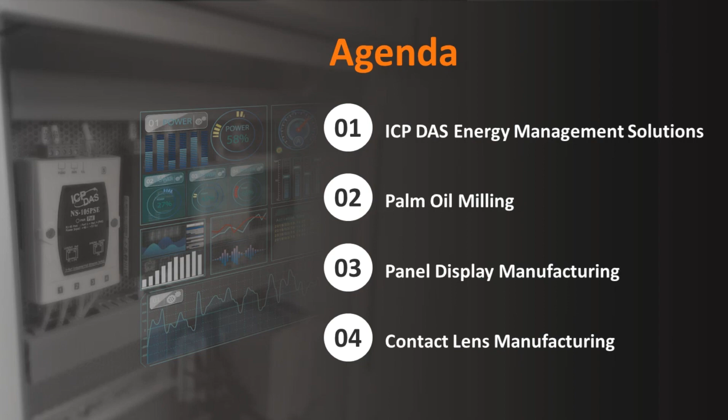Today, I would like to focus on energy management solutions first. I will briefly show you how complete and powerful our energy management products are, followed by 3 application examples where ICP has worked closely with our clients to identify their pain points, and then we implemented step-by-step projects to achieve outstanding results.

ICP energy management solutions are widely adopted in various industries, spanning palm oil, panel display, contact lens, and semiconductor manufacturing industries, as well as renewable energy industries and campus projects. So let me explain the case study of the first 3 industries in the following. But before that, let's have a look at ICP energy management products, which are holistic and reliable.

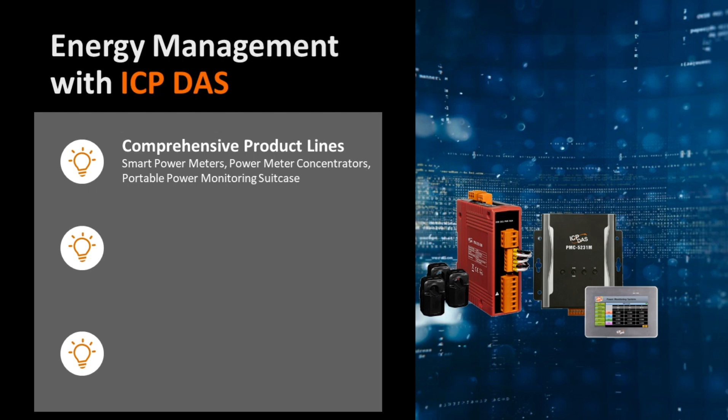We have 3 comprehensive product lines here: smart power meters, power meter concentrators PMC series, and PMD series equipped with an LCD touch panel, and lastly, the portable power monitoring suitcase.

The capabilities are extensive. ICP power meters feature high measurement accuracy, which is paramount to obtain reliable energy data. Besides, they support many protocols for seamless integration with your existing system. The unique power meter concentrators PMC and PMD series perform if-then-else logic control and data recovery functions. This can be configured via a web-based interface, and more features will be introduced later together with case studies.

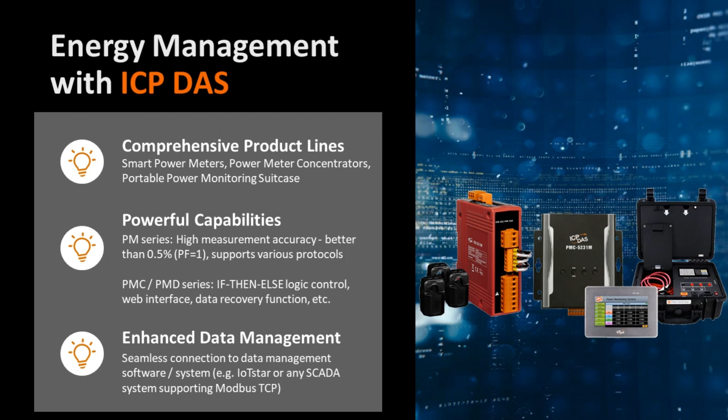If you want to manage power data effectively, our products can also be seamlessly integrated with data management software or systems for easy data management and visualization.

Plants of any size generate data at all times. If we could capture it, collect it, and visualize it for insights and analytics, we can find potential approaches to reduce power consumption, which also means saving time, cost, and facilitating a smaller footprint for equipment and devices.

Given the shortage of raw materials such as natural gas and coal, the resultant ever-increasing electricity bills force businesses to look for energy management solutions. In addition, the global climate protection initiatives drive stringent environmental regulations, and hence energy saving and decarbonization have become the main focus of businesses. This is particularly an issue for energy-intensive factories, which are equipped with lots of motors, pumps, air compressors, and manufacturing equipment. Energy-efficient production sounds valuable here, right?

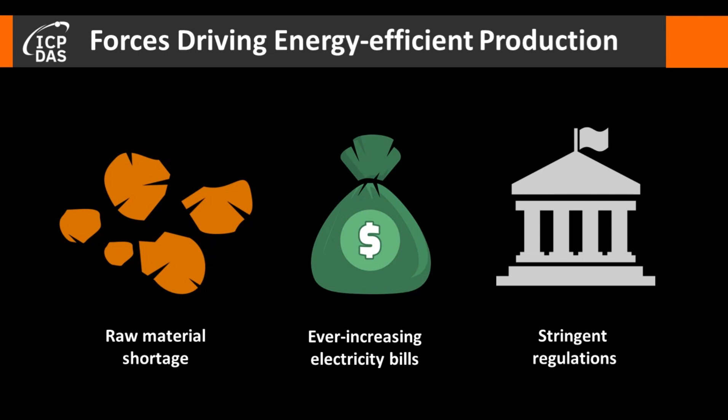And yes, it is. To be one step closer to this goal, the first step is to build a foundation to monitor and optimize energy use. Without further ado, let's dive into our first case study, a palm oil manufacturer in Thailand.

This is one example that ICP not only helps the client to build an energy monitoring system, but also the start of digital transformation. The client in Thailand faced difficulties arising from manual inspections, operations, and transcriptions, which were time-consuming and inefficient.

Palm oil tree is only grown in the tropics, and its oil is extracted from the fruits for many usages. You can find it as an ingredient in our daily necessities such as edible oil, biodiesel, and cosmetics. The edible parts of the fruits are called palm kernels.

The staff is responsible for pouring palm kernels into the storage hopper and manually monitoring the kernels dropping into the machine. Do you know that palm kernels are very sticky by nature? So its stickiness often causes a slower processing speed of the screw. This is especially a major headache when the machine is overfed with feedstock.

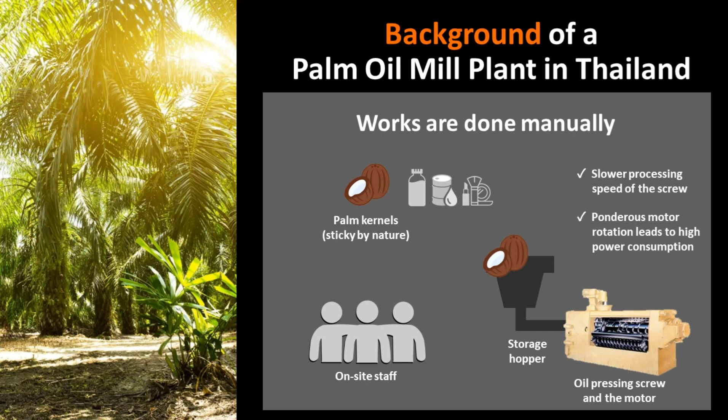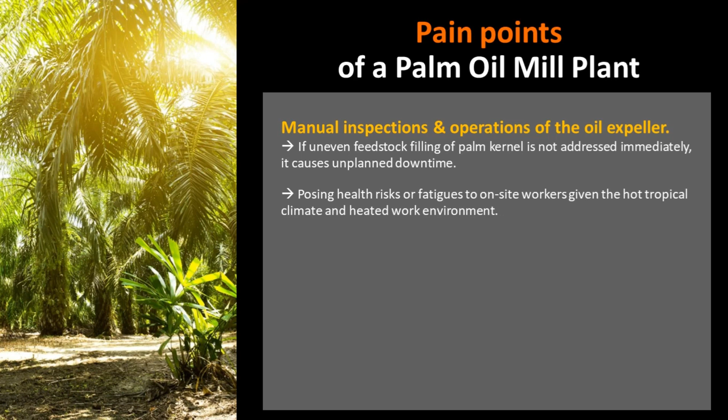Since inspections and operations of the oil expeller were carried out manually, it caused unplanned downtime if on-site staff didn't address the problem of uneven feedstock filling timely. Given the tropical climate in Thailand and the heated work environment in the palm oil mill, on-site workers are vulnerable to health risks like heat stroke or fatigue.

And the downsides of manual transcription of data are as follows. Data may appear perfect on the record sheet, but are often inaccurate. By verifying the on-site work record sheet and the machine status in the field, we found out that parts of them didn't even match each other.

For example, machine number 2 was recorded as operating for 10 hours, but it wasn't turned on at all. This was especially a problem on the night shift, as workers might feel sleepy, which results in poor work performance. This way, the data obtained becomes unreliable and less valuable.

Data on key performance indicators are not transparent and difficult to be compiled. For instance, production output, machine status, and availability were difficult to be collected and shared in real time. The information was always not up to date.

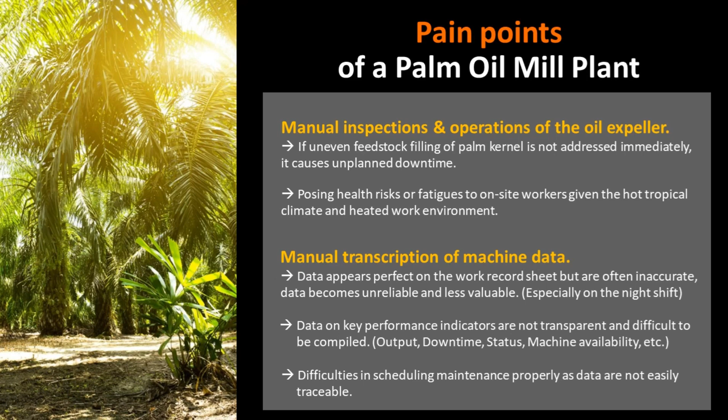This led to difficulties in scheduling maintenance properly, because data are not easily traceable, and thus there is a higher possibility of machine downtime and also additional cost incurred. So ICP thus worked alongside the client and supported them in the digitalization of the plant.

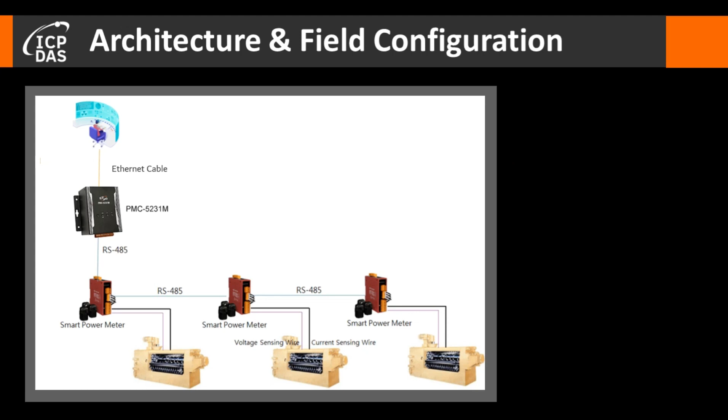We deployed smart power meters and power meter concentrators, then transmitted the real-time data to the SCADA system for energy monitoring. Here is the architecture and the field configuration.

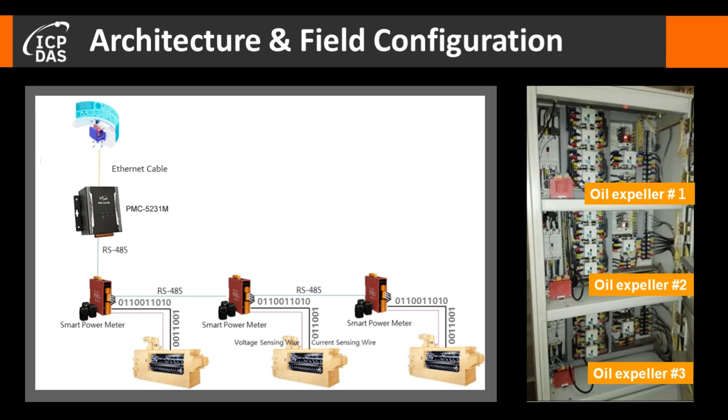Our expert team suggests employing 3-phase smart power meters to obtain reliable power consumption data from the oil expeller motors. The data are then transmitted to the IIoT power meter concentrator through the Modbus RTU, stored and logically calculated before being sent to the SCADA system through the Modbus TCP protocol.

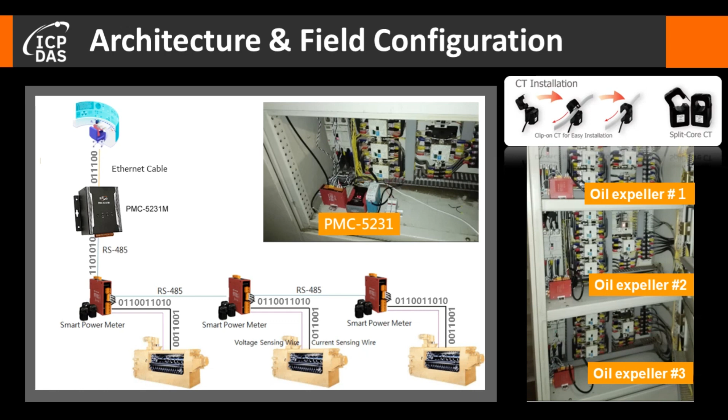If you want an easy installation of your smart power meters, we have the right product for you. One of our smart power meter advantages is the clip-on current transformer. Without having to make a significant change to your existing machines, you can get the power information simply by installing our clip-on CTs. After getting the power information, PMC collects the data and sends it back to the management software.

PMC 5231M, adopted in this case, supports Modbus TCP, RTU, SNMP, FTP, and MQTT protocols, and therefore, it ensures seamless integration with SCADA systems and IT networks such as manufacturing execution system, management information system, and cloud-based system.

If you don't have any data management software, don't worry. Our PMC series also runs on web browsers, and all you need is just a PC. Building a power monitoring system has never been so easy.

From here, you can see the electrical values such as voltage, current, and the real power. Based on the current, you can keep abreast of the machine status and different levels of the machine load. And therefore, you can schedule maintenance for machines that constantly operate with high load.

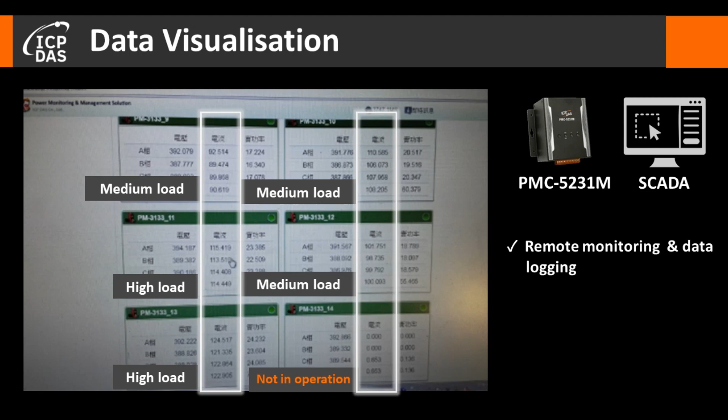This achieves remote monitoring and data logging, which were previously done manually. Besides, the timely and historical data are clearly displayed in the control center for easier machine management.

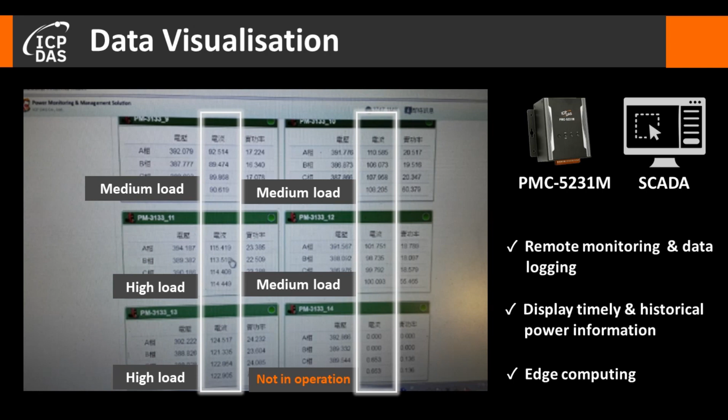What's more, the Power Meter Concentrator PMC series performs edge computing, which reduces the computational complexity for the SCADA system, and this makes the whole network operation smoother.

Other than the above-mentioned way to schedule maintenance by monitoring the current and the load of the machines, electrical values such as voltage input can also be used together with current output for data analysis. Based on different methods and models, staff can detect abnormal machine behavior and schedule maintenance before failure events. And this achieves predictive maintenance.

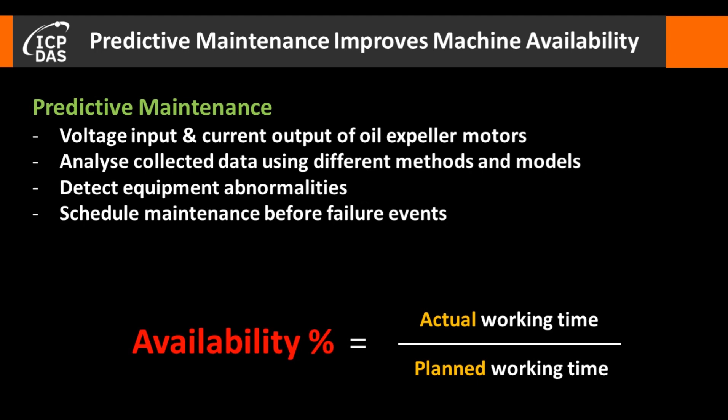Since machine availability means actual working time divided by planned working time, predictive maintenance minimizes factors contributing to low actual working time, and therefore maximizing availability percentage.

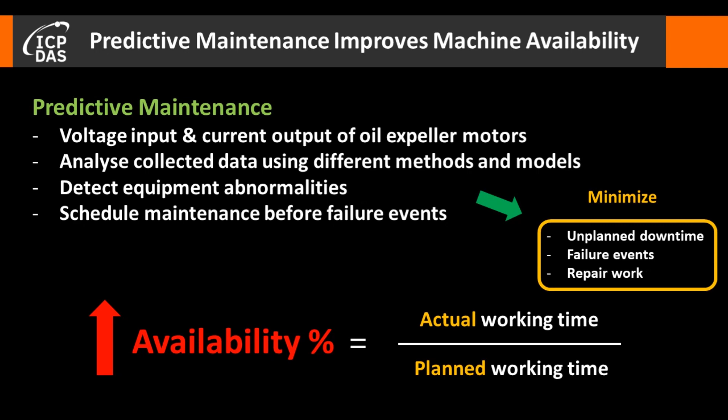Let's look at how powerful the ICP DAS PMC series is. The configuration of the PMC can be done via a web-based browser with no additional programming required for parameter settings. Building a power monitoring system is so simple and straightforward.

PMC series generates power consumption reports automatically, and one can review and check daily, weekly, and monthly reports for power management and cost references. You will be able to figure out which machine consumes lots of excessive energy and take some actions to mitigate the problem.

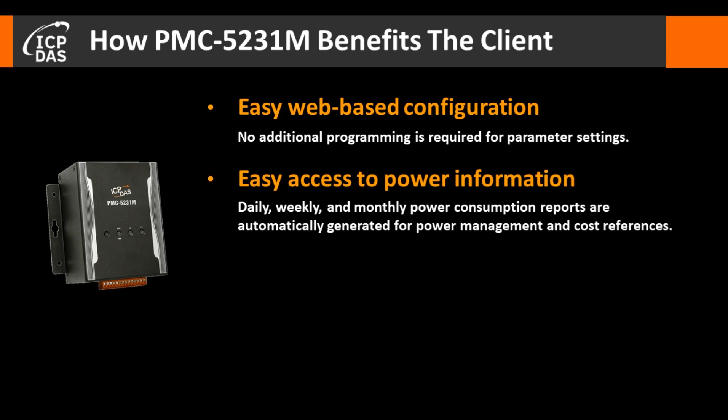The if-then-else function is also another potent feature. You can set the if condition and then trigger actions such as sending alert messages and turning on on-site lights when there is insufficient feedstock or unplanned machine status.

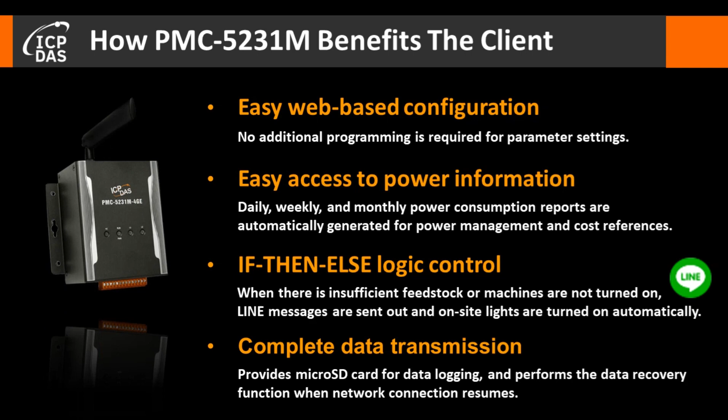Moreover, it also ensures complete data transmission with a data recovery function. If you are looking for a version that supports wireless communication, yes, ICP DAS has the right product for you. PMC 5231M 4GE for you as an option.

Now, we can give a check to see if pain points have been tackled. Remote monitoring and control replace manual inspections and operations. Less unplanned downtime and a safer work environment are achieved. Let's put a tick here.

In the middle, we see data logging replaces manual transcription of data. The client thus obtains accurate, reliable, and real-time data. Besides, the digitized data can be used for data visualization and auto-generation of reports.

Instead of performing run-to-failure maintenance, it offers great convenience for the personnel to not only access but also trace key electrical values for predictive maintenance. All this ensures few failure events and machine downtime. So this part is ticked as well.

Let's take a look at overall weaknesses and benefits before and after project implementation. The deployment of human resources is now much more efficient, and the whole manufacturing process becomes time-saving.

Besides, the problem of low productivity, especially on the night shift, is resolved. The huge financial losses incurred by machine failures and unplanned downtime are also avoided.

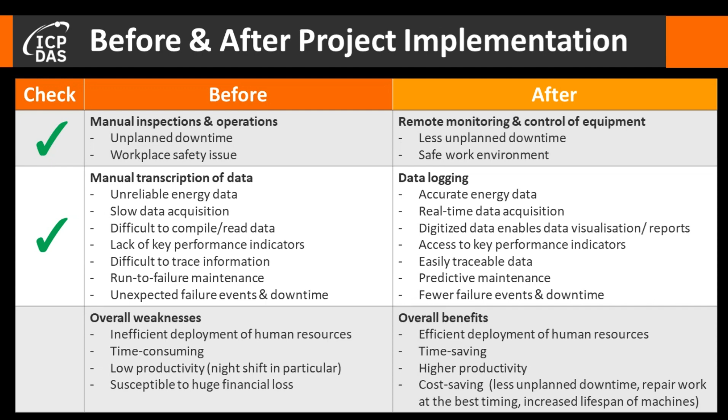Machines that consume excessive energy can be detected and repaired at the best possible time. Moreover, the lifespan of the equipment is extended through predictive maintenance. So, the problems have been tackled, and we ticked here too.

A quick summary of benefits. Productivity was raised by 28% through IIoT connected equipment. Data logging replaces manual data entry. It's time-saving and more accurate.

Remote monitoring replaces on-site inspection, which minimizes health and safety risks. Digitized information enables data visualization, and the staff can view energy consumption at a glance. It also provides a window of opportunity for maintenance planning, which reduces unplanned downtime and saves costs.

Another application is a panel display manufacturer with outstanding results. The manufacturer mainly produces TFT LCD, LCD, and touch panels. Since inverters were installed for manufacturing display panels, the client wishes to ensure smooth operation by measuring the alternating current. HEPA filters were also employed to reduce contaminants in the clean room. To know the best timing for replacing the filter, the client also installed differential pressure sensors on the HEPA filter.

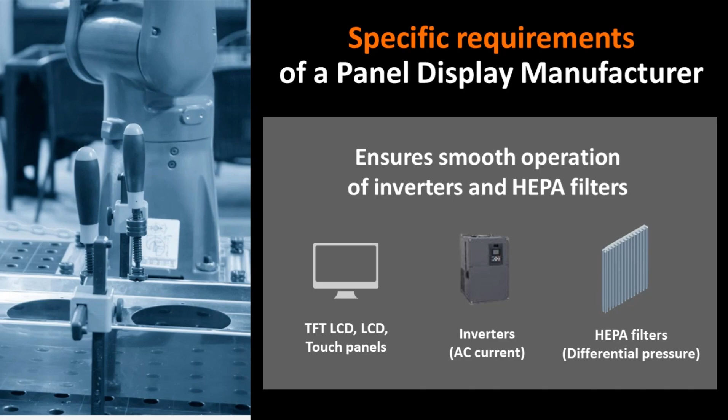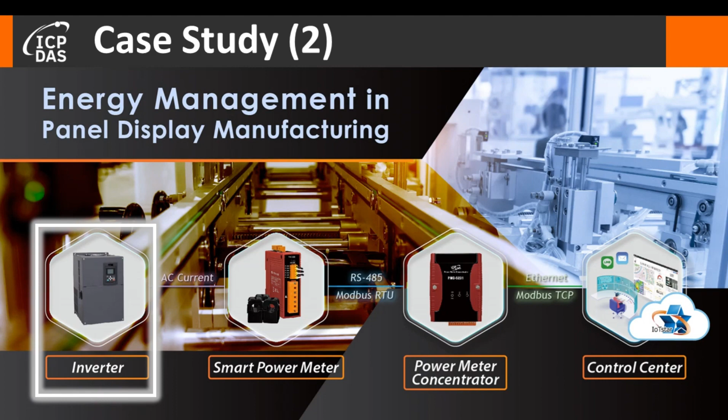What ICP did was build a wireless communication system to transmit differential pressure data from the field to the control center. Same as the first case study, we deployed ICP smart power meters and power meter concentrators. However, this time we are monitoring power information on the inverters, and we built the IoT cloud system with IoT Star for clearer data visualization.

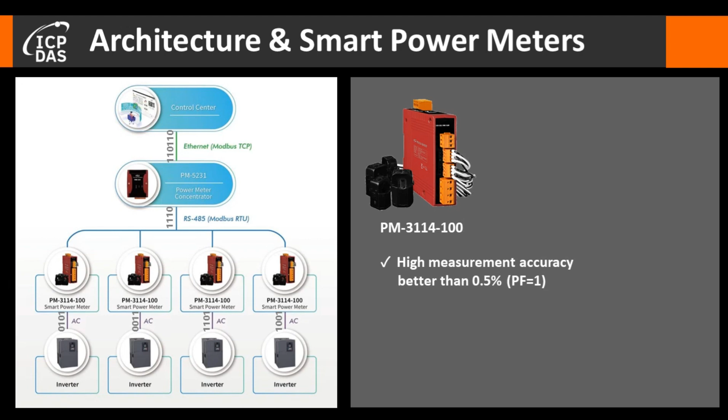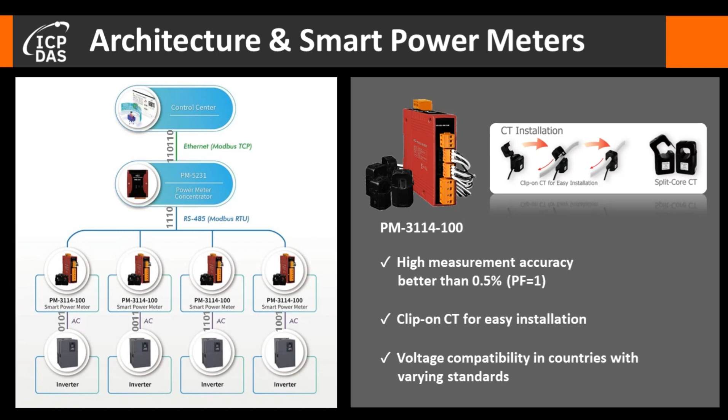Measuring devices PM3114-100 are installed on all inverters to obtain energy information. The data is then transmitted via power meter concentrators to the IoT Star. Besides high measurement accuracy and easy installation of clip-on CTs, ICP smart power meters can be applied in various countries with varying voltage standards. With the assistance of ICP smart power meters and power meter concentrators, the client has gotten real-time and reliable data on inverters' power information.

What's next? We complete the energy management system with an IoT cloud system. IoT Star is a software developed by ICP for a variety of industrial IoT applications. Deploying powerful IoT software is essential to elevate ESG performance. IoT Star enables the building of an IoT cloud system and connectivity of our WISE, PMC, and PMD series.

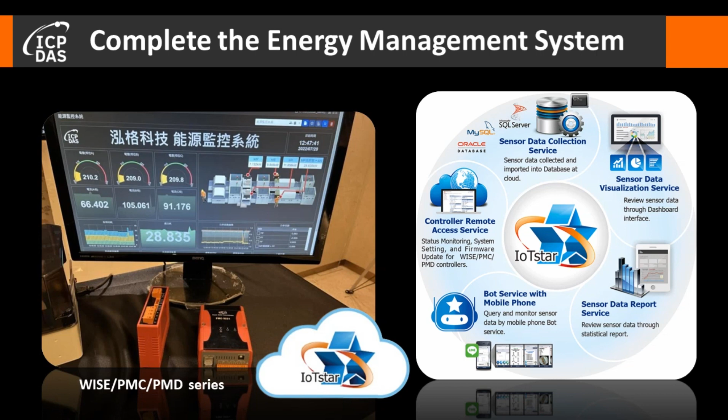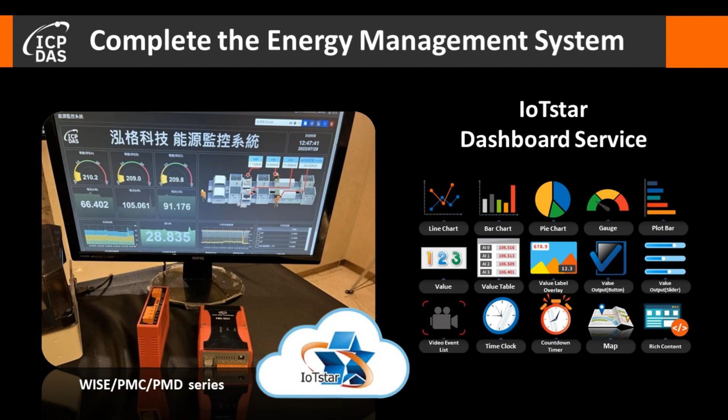The software offers 5 core services, which include remote access and maintenance, sensor data collection and storage, dashboard, report, and bot services. With the IoTstar Dashboard Service Package, users can customize their dashboard with a wide variety of widgets provided, quickly setting up the dashboard page for real-time sensor data, including energy data.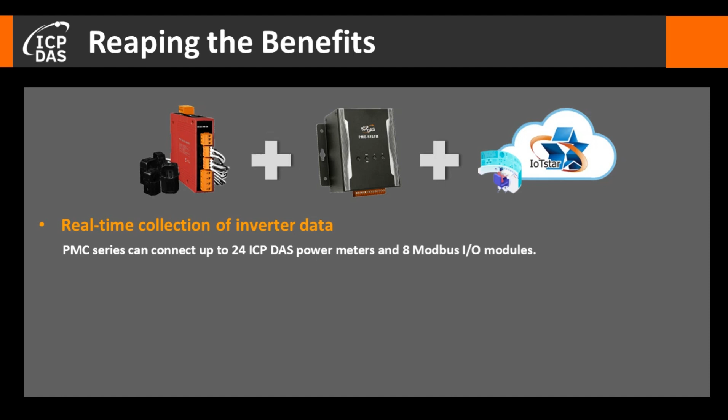The results? The panel display manufacturer is able to collect real-time data from the inverters. ICP DAS PMC series can connect up to 24 ICP DAS power meters and 8 Modbus I/O modules, so it's very cost efficient. Once data is at your fingertips, machinery protection of inverters becomes much easier.

Facility staff can review energy consumption data and identify deviations to schedule maintenance at the earliest possible point in time. This reduces machine failures, unplanned downtime, and most importantly, reduces huge financial losses. Last but not least, the IoTstar dashboard clearly shows various indicators, allowing for easy footprint calculations and management.

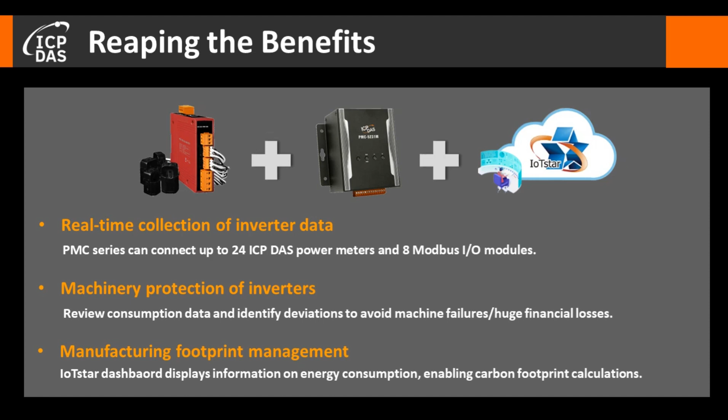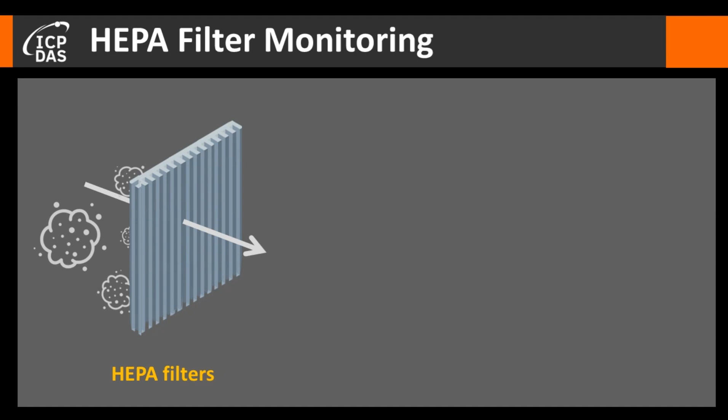After introducing the energy monitoring system for inverters, let's talk about the HEPA filter monitoring this client adopted. The high-efficiency particulate air filters are widely installed in cleanrooms for effective air filtration. To find out the best timing for replacing the HEPA filter, the client carried out differential pressure monitoring by installing sensors at the inlet and outlet of the filter.

Hence, data on the pressure drop across the filter can be obtained. When particulates accumulate, the frictional forces lead to a higher pressure drop between the 2 points. Once the pressure drop reaches a particular inefficiency threshold, this indicates the HEPA filter needs replacement.

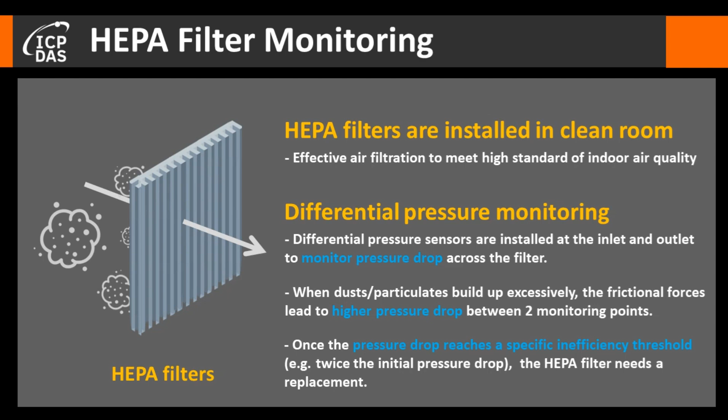What ICP DAS did was build a wireless communication system for data transmission. We employed our Zigbee I/O modules to collect data from differential pressure sensors through Modbus RTU, and then the I/O modules wirelessly transmit the data to the Zigbee converter. In the end, the data are sent to the SCADA system via Modbus TCP.

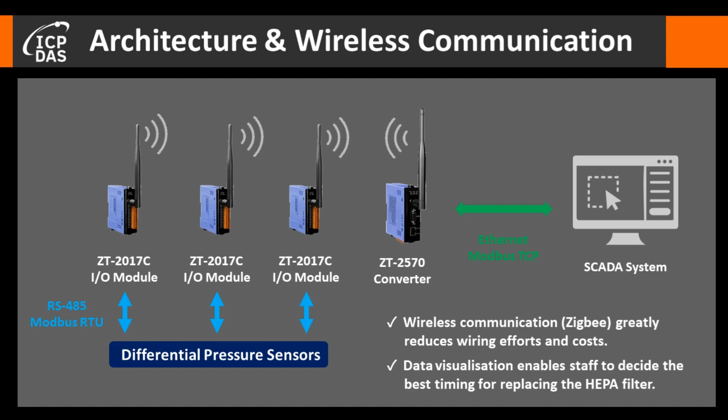This architecture greatly reduces wiring complexities and costs. At the same time, data visualization enables staff to decide the best timing to replace the HEPA filter. And most importantly, this ensures a conducive cleanroom environment.

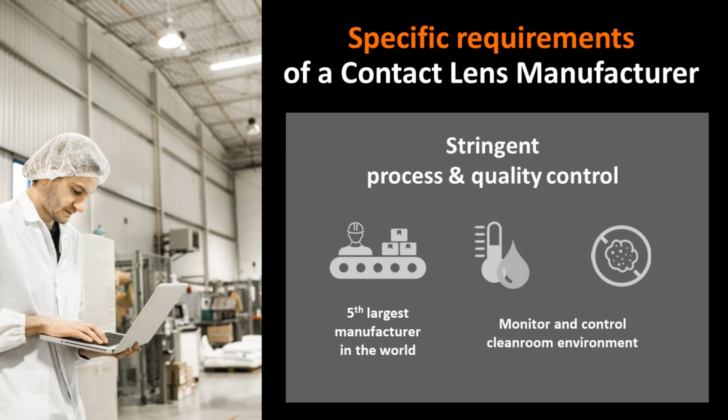Another iconic application is a contact lens manufacturer, one of the largest in the world. To ensure product quality and consistency of product line performance, the client carries out stringent process and quality control on the shop floor and in cleanrooms. Therefore, they requested energy consumption and environmental monitoring solutions.

We deployed ICP DAS power meters, power meter concentrators, and the environmental monitoring modules DL series to monitor and control the cleanroom environment and machine status. And ICP DAS LED message display was also placed in the field to keep staff informed.

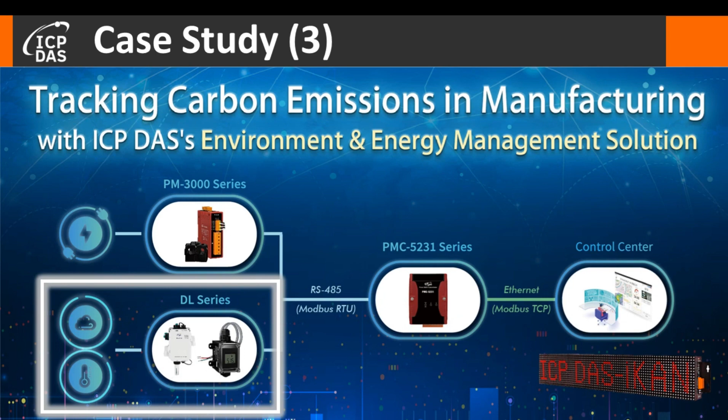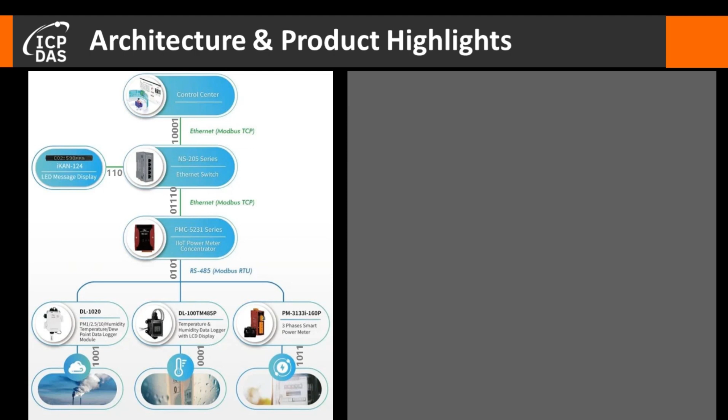The architecture is pretty similar to the previous 2 case studies. However, this time, we added environmental monitoring modules and an iKAN LED message display. The smart power meters adopted in this case study are also very special.

From its model number, you can see that it has built-in circuit protection to prevent CT placed on the secondary side from causing open circuit danger to humans. It also has built-in AC isolator protection, meaning total isolation between the AC measurement side and the control side. These features further ensure functional safety and worker safety at the same time.

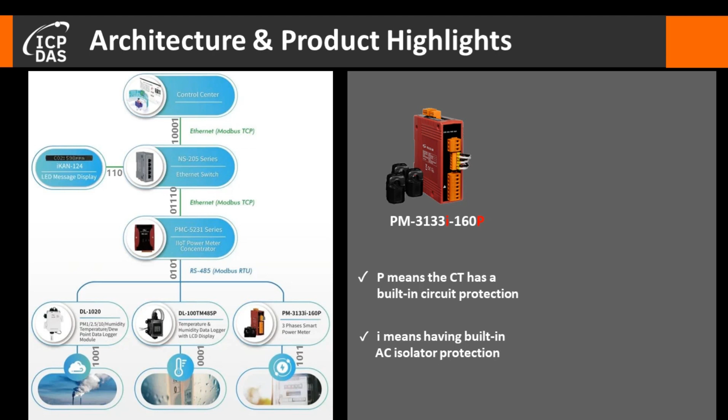Besides, the iKAN LED message display also features powerful capabilities, as it is anti-noise and easy to use, and it supports multiple languages with 7 colors available.

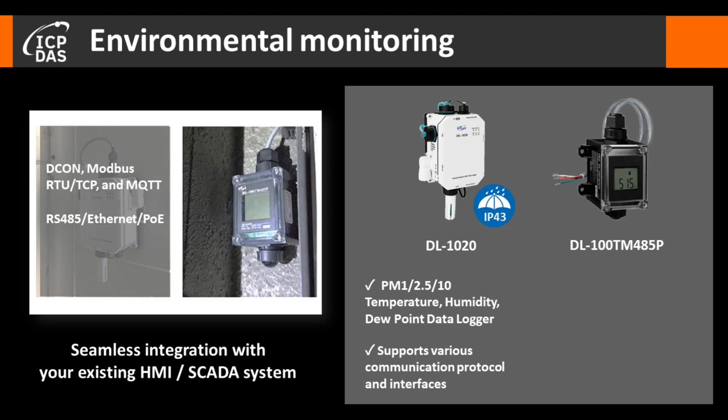For the environmental monitoring, the DL1020 data logger module is IP43 rated. It measures and records PM1, PM2.5, and PM10, temperature, humidity, and dew point. Besides, it supports various communication protocols and interfaces for seamless integration with your existing HMI or SCADA system.

The DL100 series module is a remote temperature and humidity data logger with LCD display. It has an IP66 rating and performs with high measurement accuracy.

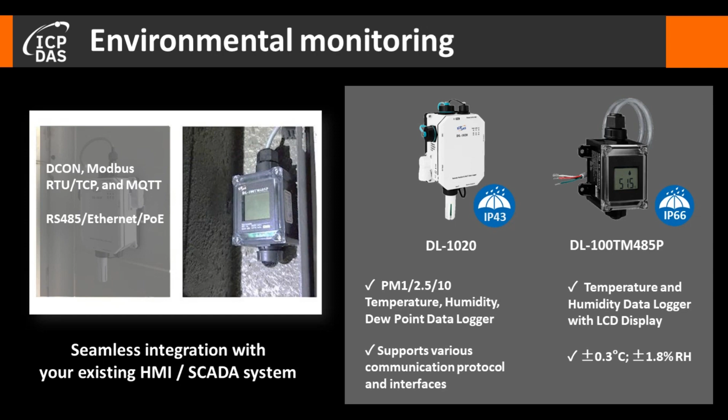The DL-100 series supports convenient data access and has a cost-effective design. One can obtain real-time data anywhere and at any time using the iAir utility, the iOS or Android app, which are free of charge, or via a regular web browser, as long as they are connected to the same local network as the data logger.

The replacement filter is also provided for easy and simple maintenance, which can be done by the facility staff. This greatly saves cost and time incurred by repair services. Besides, it also further enhances measurement accuracy by reducing inaccurate data obtained from clogged sensors.

What are the benefits here? This solution ensures effective management of data on power consumption and environmental variables. Once data are well organized and evaluated, the client is able to perform stringent process and quality control of contact lens manufacturing in both clean rooms and production lines.

Besides, actions can be triggered via if-then-else logic control to adjust the on-site environment conditions. For example, sending alarm notifications to the right personnel when PM2.5 readings exceed the set value.

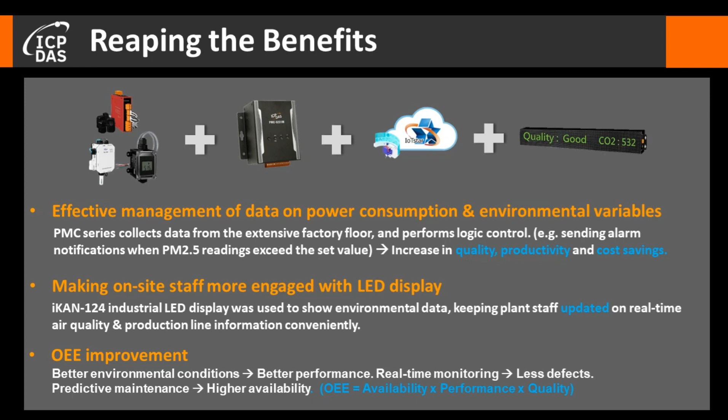With ICP DAS energy management and environmental monitoring solutions, the client doesn't have to guess what environmental factors may lead to quality defects. There's no more wondering about when is the time to repair which machines, because data are more transparent and can be acquired in real time for clear data visualization and actionable insights.

In summary, ICP DAS energy management solutions comprise 3 architectures so far: PM series, PMC/PMD series, together with PMC data server, SCADA system, and web pages for data visualization. PM series, PMC or D series, together with IoTstar dashboard display for cloud-based applications. And PM series, PMC or D series, together with environmental monitoring modules, IoT Star, and iKAN series for field display.

Our product series support various communication protocols and interfaces. Therefore, all machine data can be integrated into your existing system very easily based on your company's preferences.

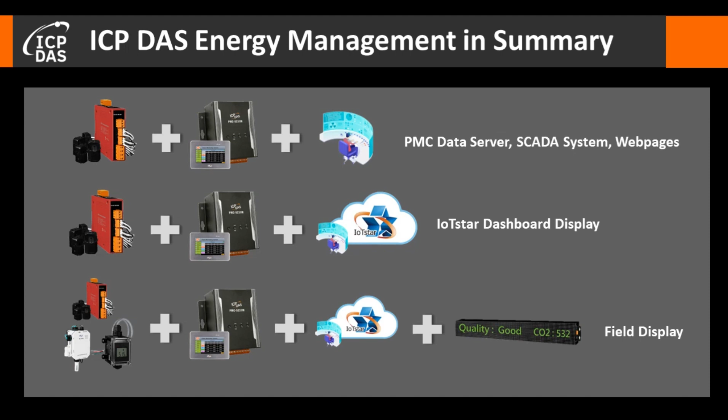In recent years, incorporating ESG thinking into business objectives has gained great importance. Besides, EU's carbon border taxes have been phased in gradually from this year onwards, which affect the manufacturing supply chains globally. Thus, ESG adoption soars.

Take Taiwan as an example. It can be observed that almost half of the total greenhouse gas emissions are generated by the industrial sector, especially caused by electricity consumption. And it clearly shows that there's a strong need to reduce energy consumption in this sector to reduce carbon dioxide emissions.

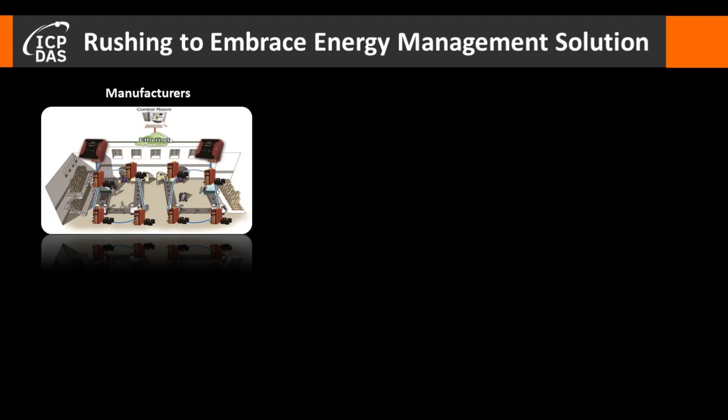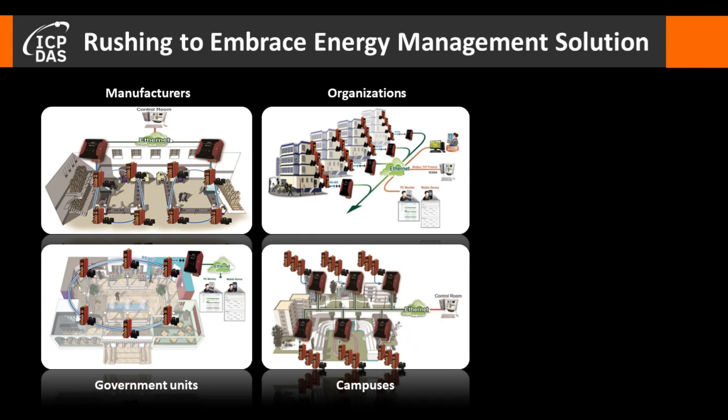Besides manufacturers from the industrial sector, organizations, government units, and campuses are also rushing to embrace energy management solutions to save costs in an efficient and smart way. Once you keep an eye on energy consumption, you will be able to get a quick return on investment.

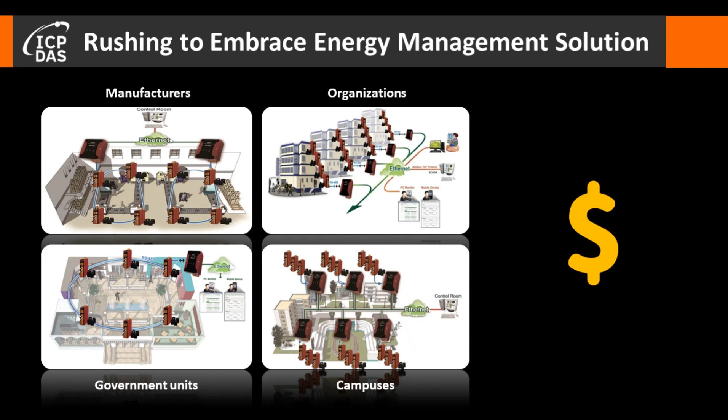ICP DAS Energy Management Solution gives you fundamental building blocks of your plant's operations. First thing first, you have to get and collect energy data for analysis. And it's not just data, we need reliable data.

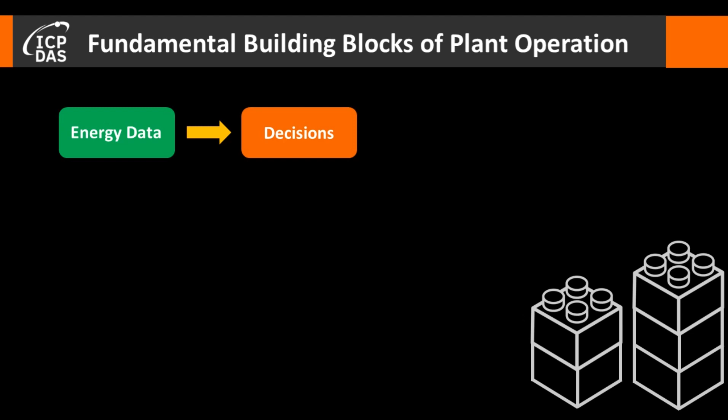And then make critical decisions such as preventive maintenance. Then you are one step closer and even able to achieve energy efficient production.

Your immediate return on investment includes cost and time savings, which are the direct results of energy savings, higher productivity, and compliance with the regulations.

However, this is not an end in itself. You will get a competitive edge such as shorter lead times, better product and service quality, and this brings you more business opportunities.

ESG adoption further enhances your brand reputation, and the resources saved can be channeled into other divisions for more business development.

Just as importantly, the scalable energy management system can further expand and grow the volume of the collected data, which benefits the entire company as a whole.

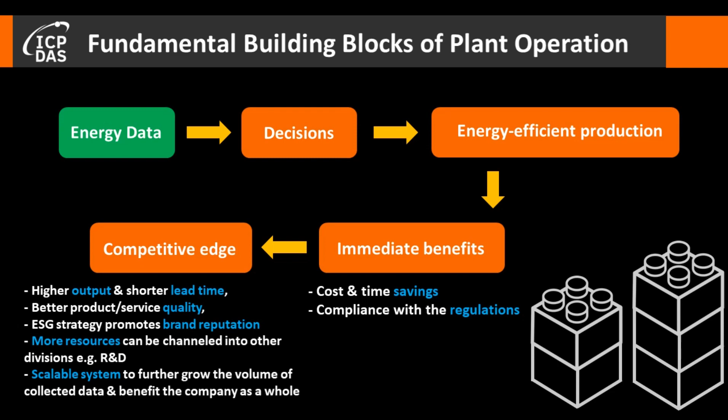ICP DAS understands the importance of digital transformation in the manufacturing industry, which is why we have made it our mission to help our partners kickstart this process. With our efforts, we have achieved tangible and noticeable results. We empower your future readiness for Industrial 4.0 and business sustainability.